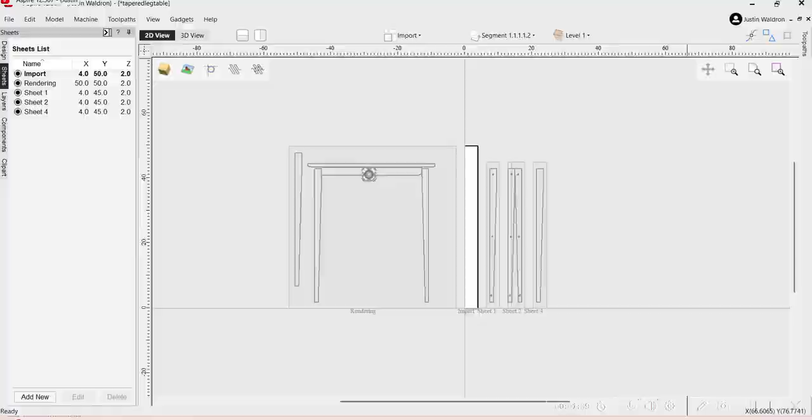But anyway, I'm going to bounce between OnShape and Aspire, but for this, the Vectric would work first. So what we're looking at making is just a tapered table leg.

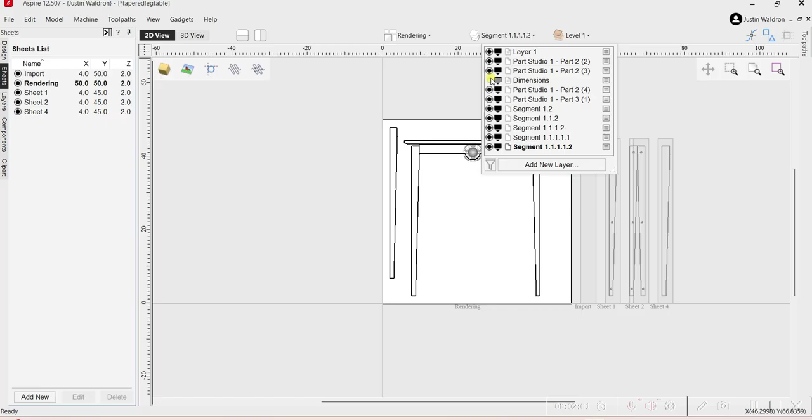So what I have is this hall table that I've drawn up just to show what we were looking at, and I went ahead and added dimensions to this table so we know what we're making. The only thing, after designing it, I would have probably made this apron like 3 inches or so. But nonetheless, I'll show you all how I went through just making the leg itself.

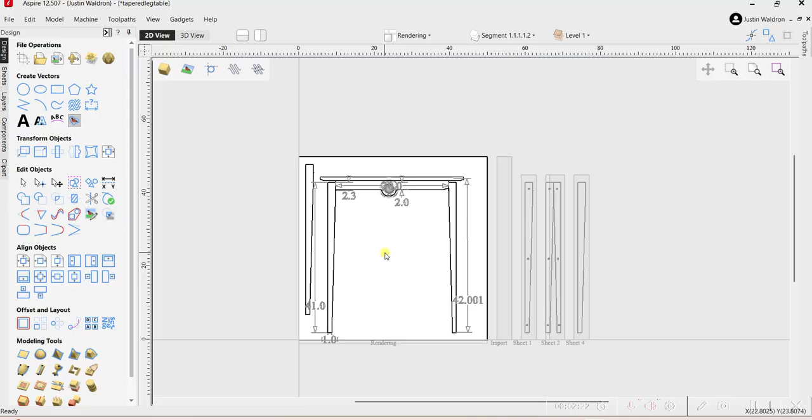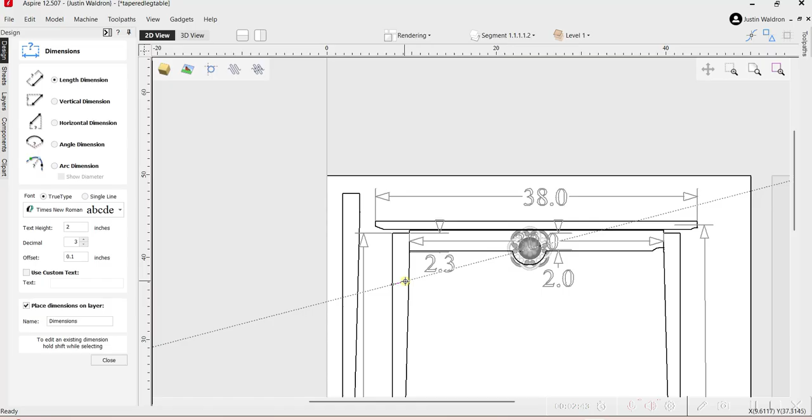So if you don't know, we have a dimension tool over here where we can take the overall dimension of a piece. So you can actually use this as a parts list, or once you design your stock, you have your parts lined up so you could cut from here.

Anyway, we're going to turn this off, and I'm going to just add a new sheet really quick. And we'll give us some room on this one.

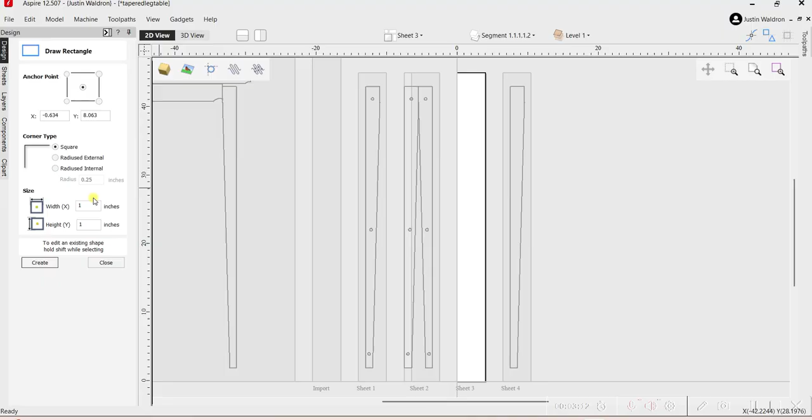So our leg stock I've got at 2 inches thick. And the first thing I want to do is I want to draw what is going to be our leg blank. So here's our leg blank.

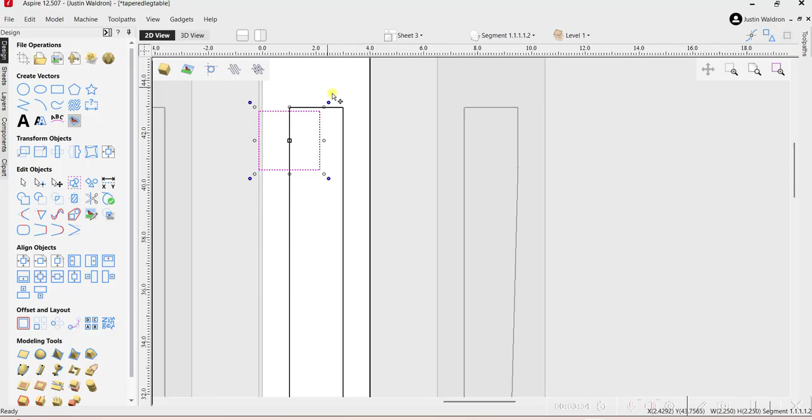Then what I'm going to do, I know that my apron is 2 inches wide. I'm going to make a 2 1/4 inch square. And I'm going to stick this right at the top of this table leg that we made. I like using these shortcut keys over here for placement.

And then I want the taper to start 1 inch from the bottom. So I'm going to make another cube. And I'm just going to send this down to the bottom. This will make sense once we get there.

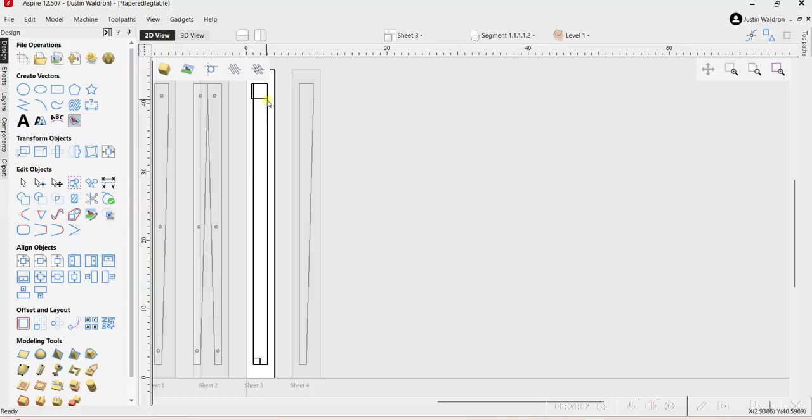So this is outlining where my taper is going to start back up to nothing. So I'm just going to grab the line tool, stick a point there, and we're going to call it right there just for show and tell here.

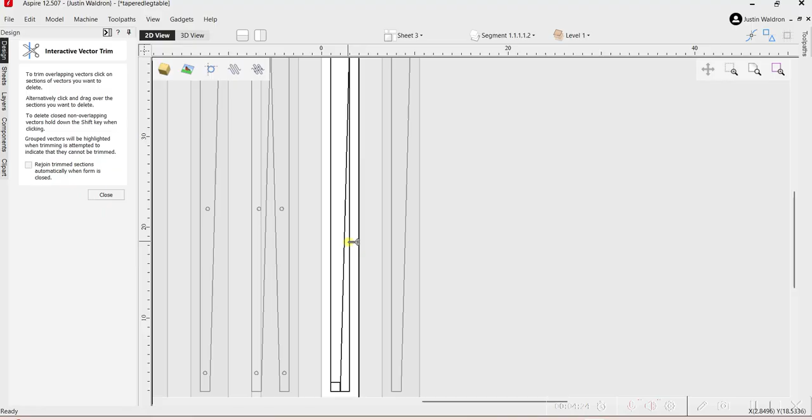Then we'll just come in with the snippet tool, Control Z if you didn't know. We're going to delete these 2 blocks. And all I did with these blocks is it was just as a reference.

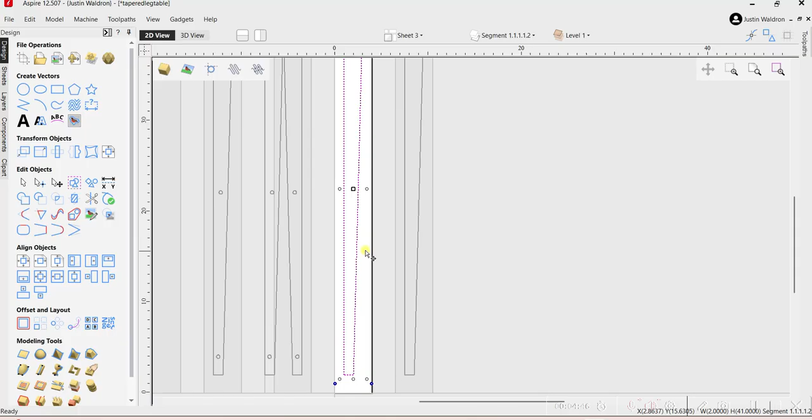And then we're going to go over here and we're going to join these vectors. So now we have what's a solid vector. So if you have a 2 inch piece of stock and you wanted to cut this taper, you would just simply set up your profile cut around the side.

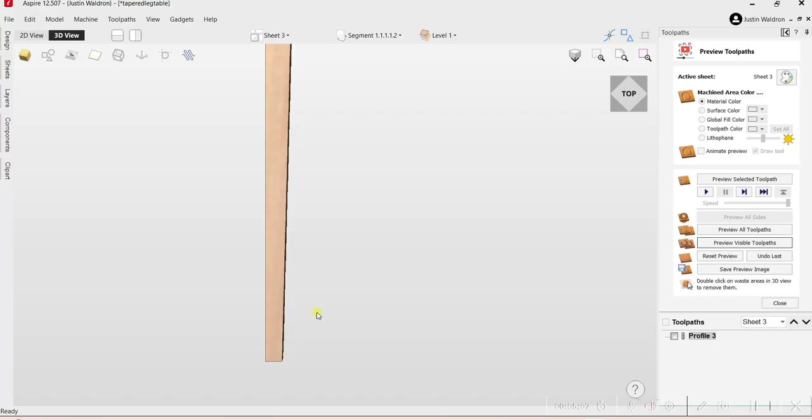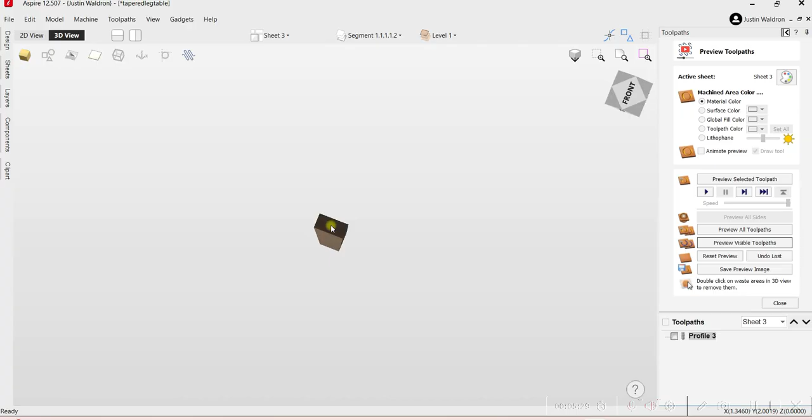And then we're left with this right here. Now, if you wanted to also add an inside taper to this, you would make this cut first, then rotate your stock over on the CNC, run that same profile cut that you just made, and that'll cut this inside portion off. And that'll give you your 2-inch down to 1-inch taper on the inside part of the leg.

So the other thing you can do if you don't have 2-inch thick stock is we're just going to take this half leg that we made, for instance, and we see I have some drawings here. We're just going to drop in a couple holes for dowels. I made these 0.38, little room for a 3/8 dowel.

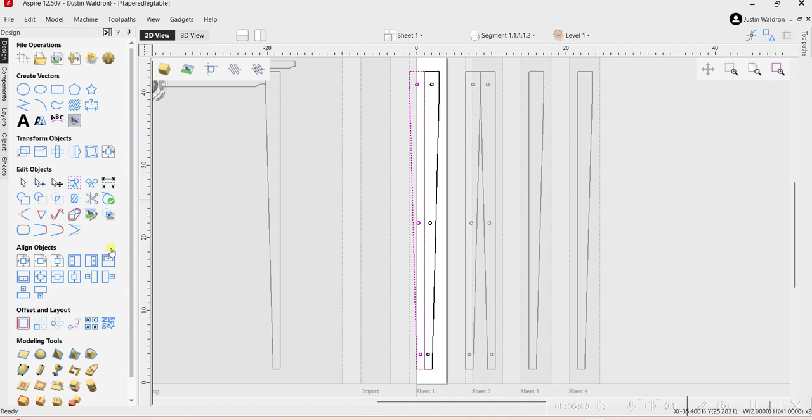So here's one leg half. And then if we come over here to the mirror tool, here you have what would be a book matched leg. So these two pieces would get cut, you would glue them together, you have your registration, and then you would go back to the profile cut that we just made to cut that inside part of that leg blank if you were interested.

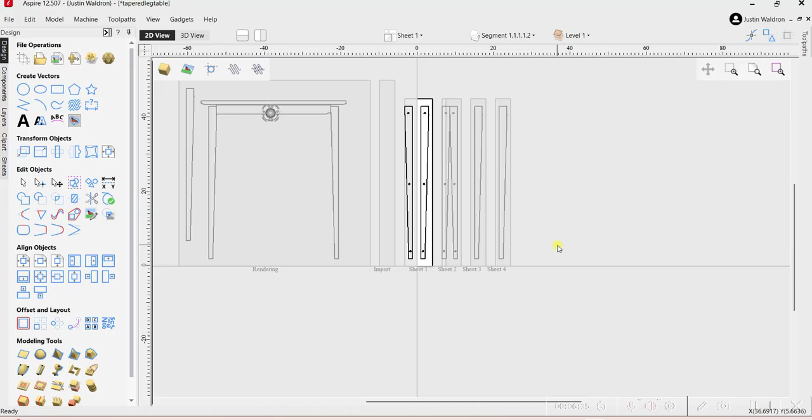So the next thing I'm going to do is I'm going to go over to OnShape and I'm going to show you how we can design this part in OnShape.

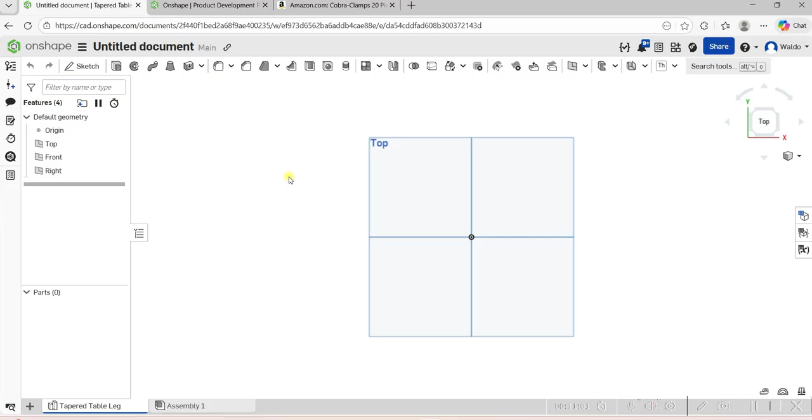I do enough rambling, so I'm moving on. When you open up OnShape, you have an option of creating a document. I've already done that, so I've set this up as if we were looking at a 2D view, just like we were in Aspire, and that's how I'm going to model this.

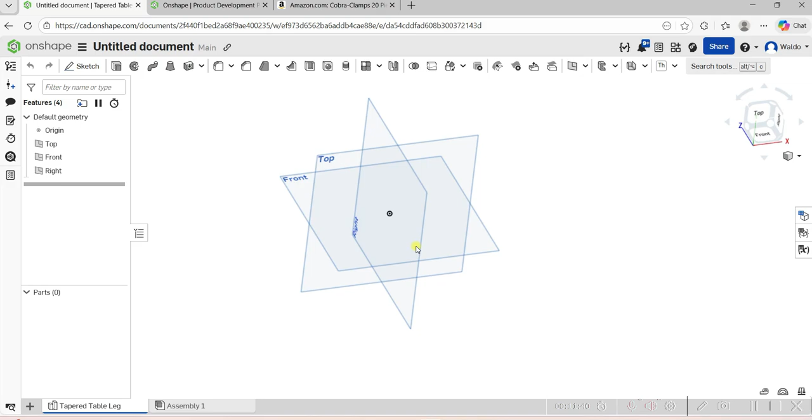So anyway, basic functions of OnShape. Here we are in OnShape. This is a true three-dimensional software, so you can see your XYZ planes, top, bottom, everything. That was the hardest part for me in the beginning because I'm so used to that 2D plane, and now you have options. So I'm going to try to simplify this a little bit.

Like I said, I'm going to explain what I'm doing, but I'm going to move moderately fast so everybody can see. And again, you want to go back and watch.

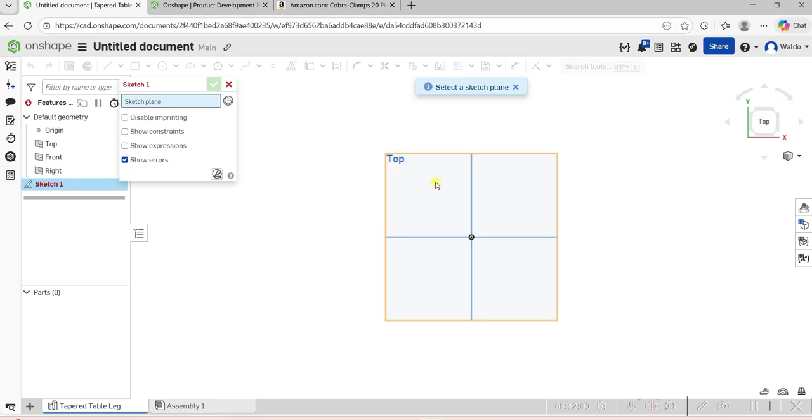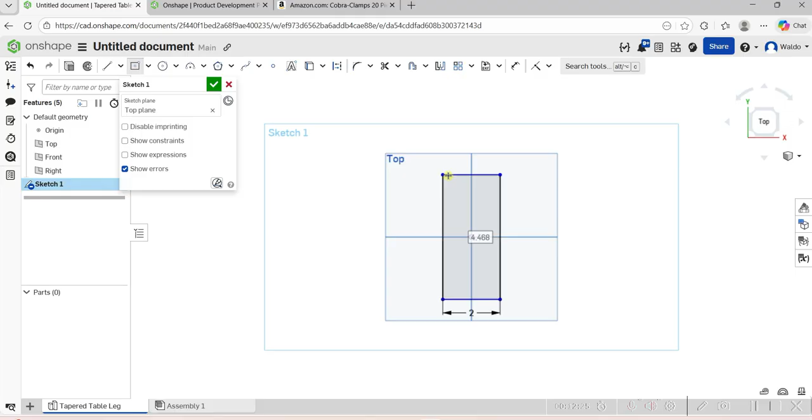So we're going to select this top plane. I'm going to come up here to this corner triangle or rectangle tool, and grab a center point rectangle. With OnShape, I just left click, let go, and here's the start of our shape. I'll left click again, and then do our dimension of 2 inches wide by hitting 2 and enter, and then 41 inches tall. Here's the overall sketch of our table leg.

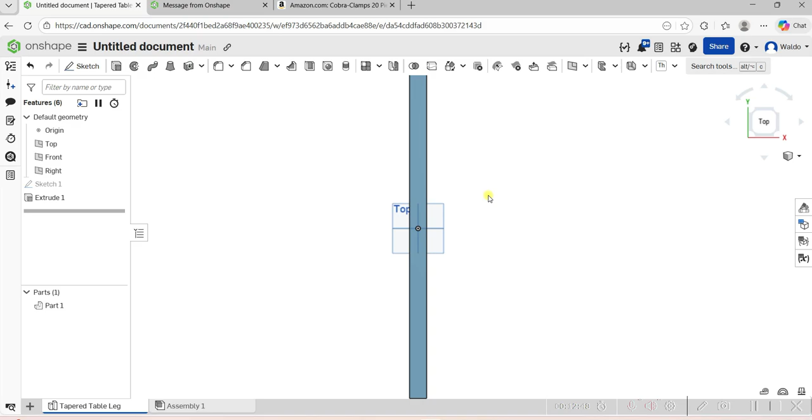So we have an option here right away where I can extrude this and make it 2 inches thick, which is what I think I'm just going to do. So we're still in the 2D view, let's say, but now if we spin this object, we can look at all 4 different sides of this.

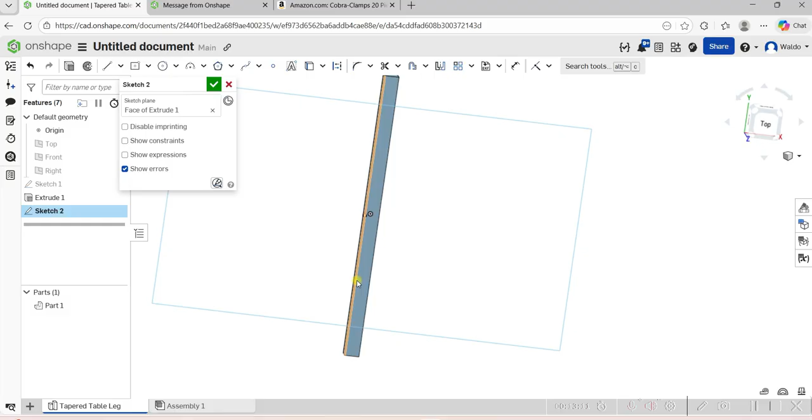For this next part, I'm going to turn these planes off with a P. I want to sketch on this face because now we're going to draw what's going to be our taper. We can click on the piece and hit N, which brings whatever you're looking at normal to your view. So if we look, we're back at this top plane over here.

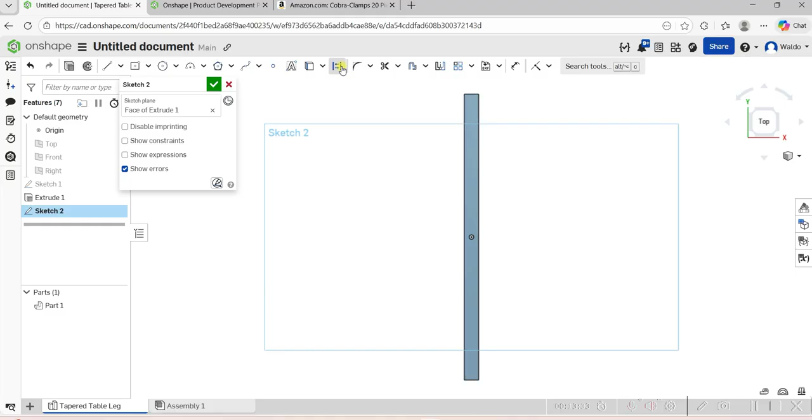Now we're going to go up here to this line tool. This is a line, and you have a few options here, and this is called a construction line. I want everybody to think back to what I did in Vectric, where I did the 2-inch block or 2 1/4 inch block up here. So I'm going to do the same thing, except I'll use this line and construction tool, and come down 2.25 inches, let's say.

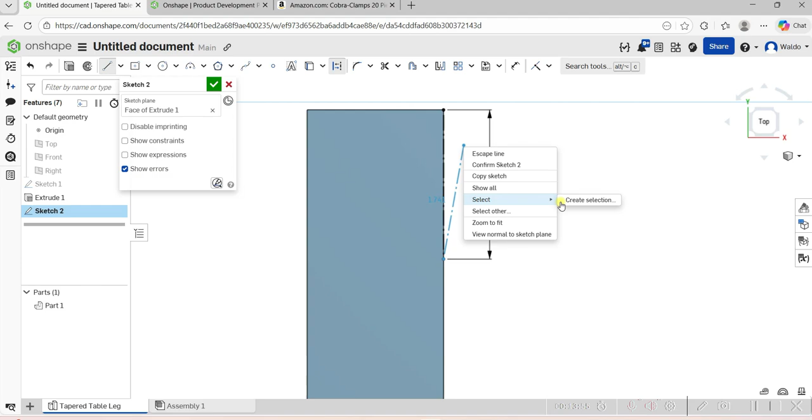To make this easier to understand, in Vectric when we have a solid line, we have a completed vector. When we have a broken line, we're incomplete. So that's basically what this is, just a guide for us.

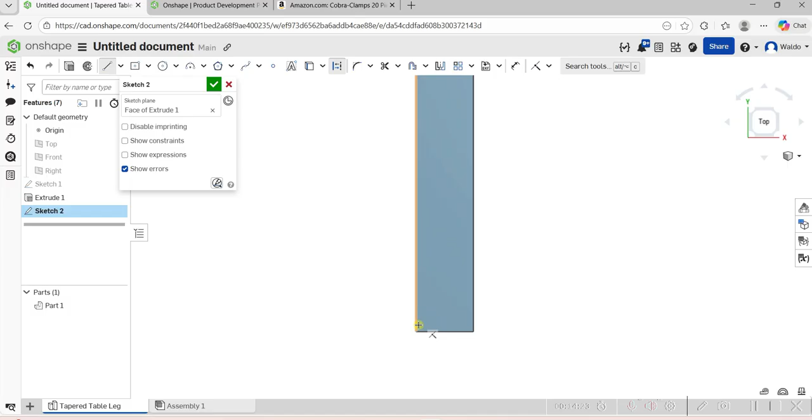So then I'm going to go down to the bottom here, and we have shortcut keys, L. Here's our line tool. If we hit Q, that activates our construction mode. This is all going to make a lot more sense here in just a minute. Okay, we're not going to worry about that there. So we have a 1-inch guide there.

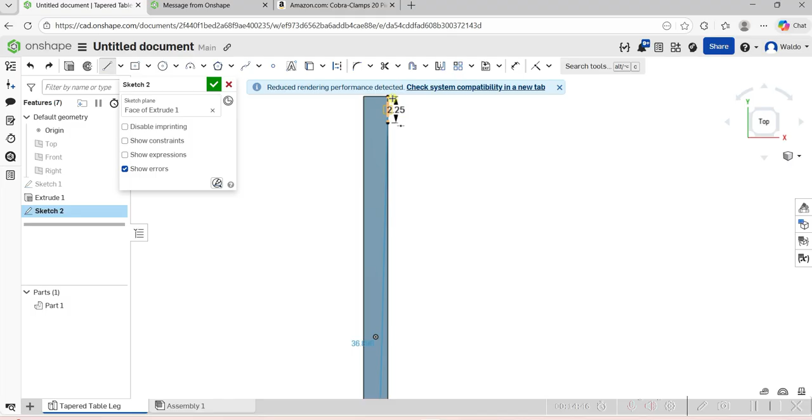We're going to hit L, our line tool, and grab this point. This is what I like about Onshape that's different than Vectric—Onshape can tell, hey, I know you want to grab this point, and you can see by the little icon that shows up that we're tangent here, or in plane with this, etc.

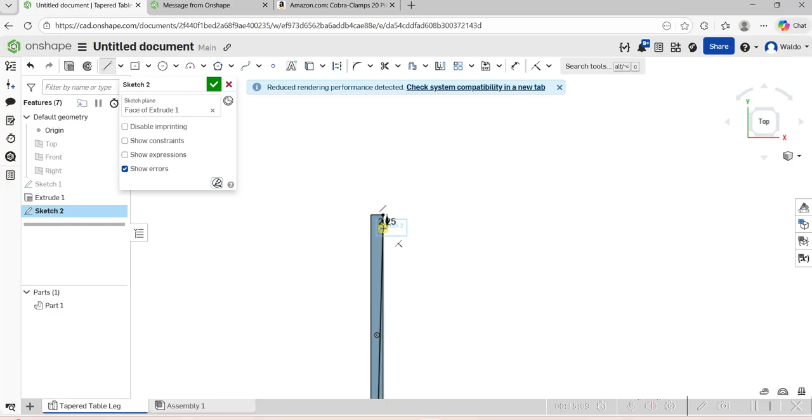So the next thing we're going to do is complete this whole vector here. We're going to draw a line to this corner here and back to here. So now what we're looking at is a three-dimensional view of that leg with our sketch.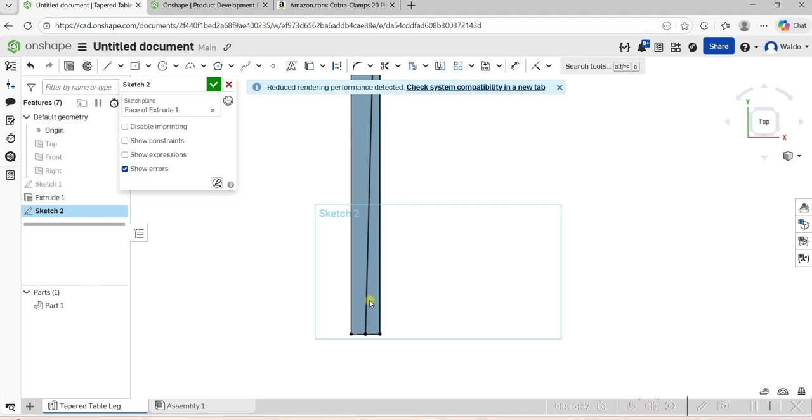This just means your Wi-Fi may be a little goofy. So what we want to do now is cut this inside part out. If you hit the space bar or escape on this one, you can see this side highlights, this side highlights. We're going to highlight this side with a left click, come up here to extrude, hit remove. You can do 2 inches here because our stock is 2 inches, or you can just hit through all, and it will remove that whole piece for you.

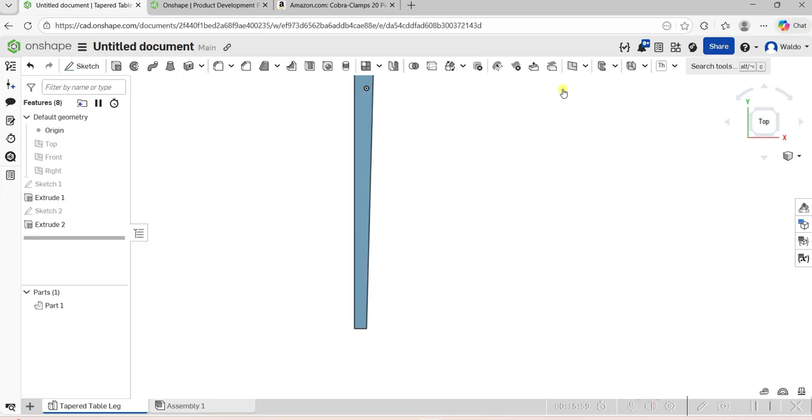So here we are with our three-dimensional leg, just like we had in Vectric. Now, if we want to make this inside, we're going to do the same thing we did before. We'll short key, and sketch, using a line tool.

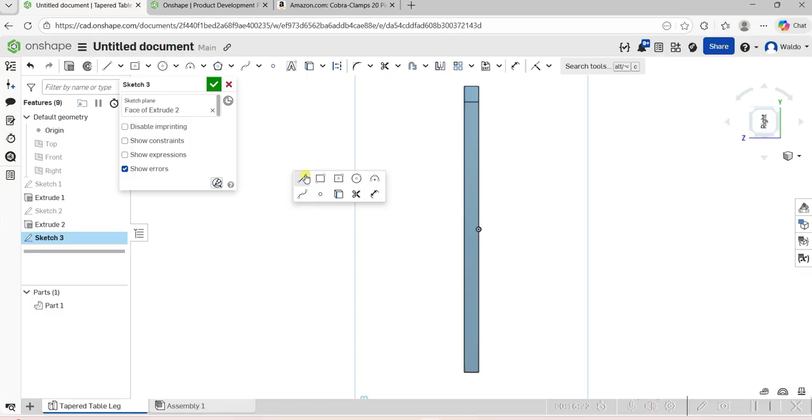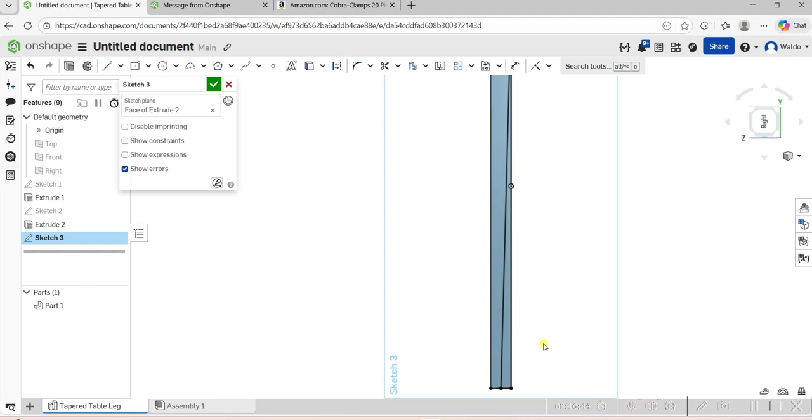Q, and all we need down here is to come in and drop, and that's 1 inch. We're going to short key just like we did before, grab this point, and then do the same thing—remove this inside portion.

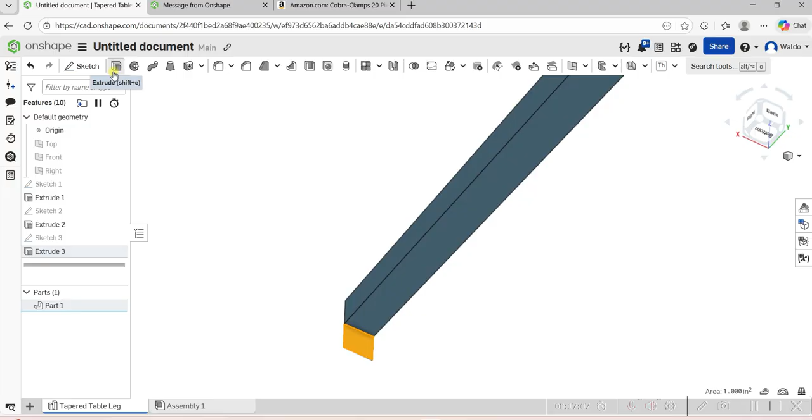And here we are. You can see I didn't quite grab that bottom long enough to get this cleaned off, so it's this simple—we're going to just left click that, hit remove, and there we are.

We're back in business. So this is a super quick tutorial. I don't know how long this took, but even so, showing how to design this three-dimensional part.

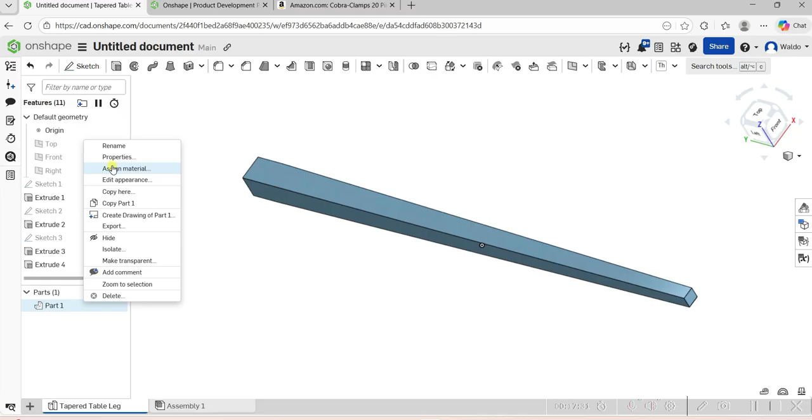So now what we're going to do is export this. We're going to go here and export this piece. We want to export it as an STL. Here it is up here. You can just open this if you want.

But we're going to go back over here into Aspire now. And if we see, I've got this import tab set up here. So we're going to import this component model.

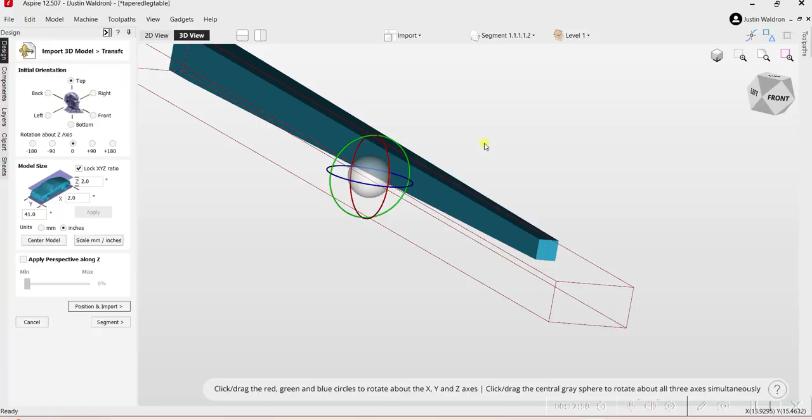Now, the only thing everyone is going to have to pay attention to when bringing this in is the direction on which that taper is. So it looks to me that the taper is here and here, so I'm going to rotate this.

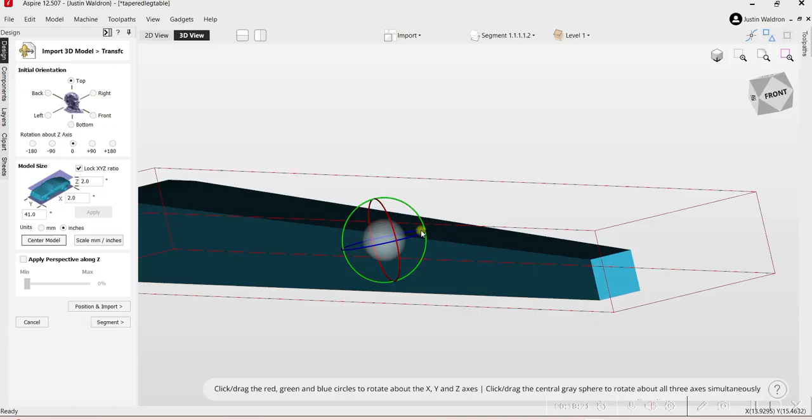90 degrees, then I'm going to center our model. This is a lot easier if you're not using this double-sided taper deal. So we're going to position and import this. I want our leg stock shown above the material because we're going to cut all the way through. We're going to import this.

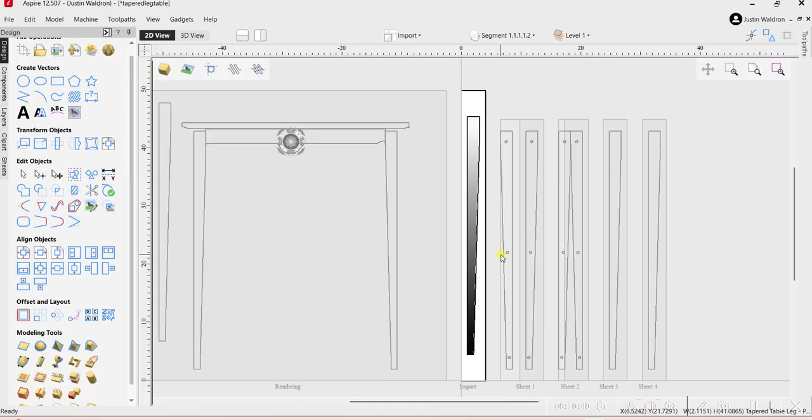We're going to highlight this and come down here and draw a boundary box around that, so now we can make a profile cut if we need to. I'm going to make the tool paths just to show everybody, but these are not going to be the tool paths you should use for sure.

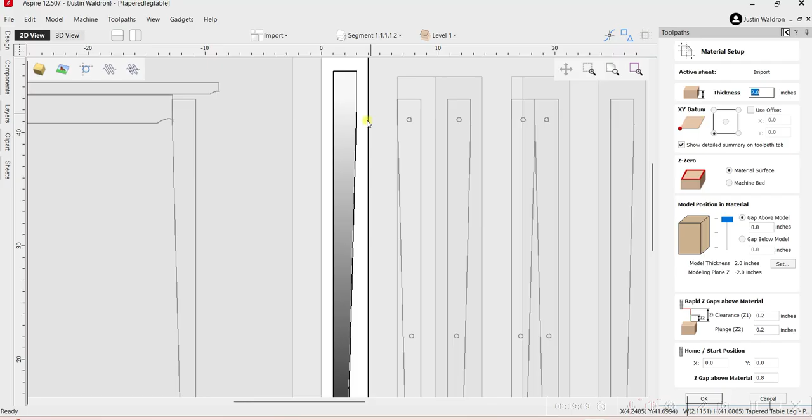You're going to set up your active sheet so it shows our stock is 2 inch thickness. Lower left datum is what I always use, material surface. We're not going to have any gap above the material because we're 2 inches and we're going to make a 2 inch cut. I keep my rapid Z movements at 0.2 above the material, and we're going to hit OK.

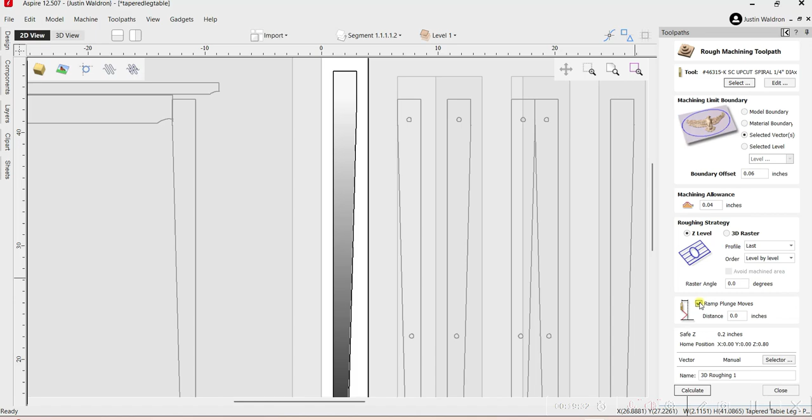I'm showing a 1/4 upcut spiral bit, and we're going to come up here and set ramp plunge moves. The other thing to take a look at, go back up here and check to see what your step over is. Our step over is at 40%, so no matter what, we're going to get kind of a rough cut there.

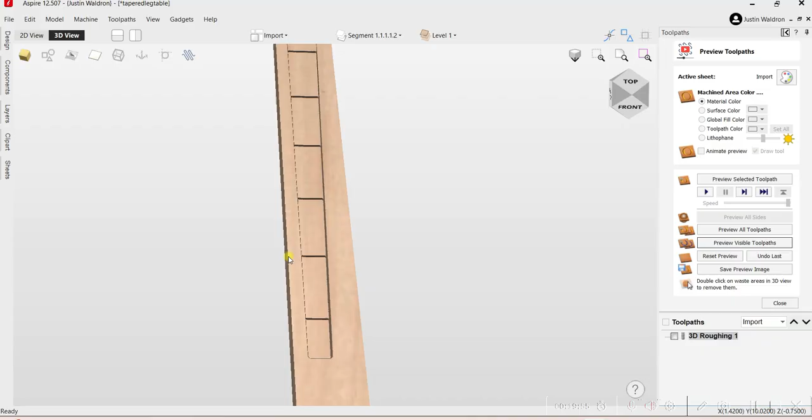Okay, so here's our roughing tool path. You see that's basically all we're left with on this inside face. So you can decide whether you're going to sand that bit off if you want, or come back with a bigger end mill and clean that up.

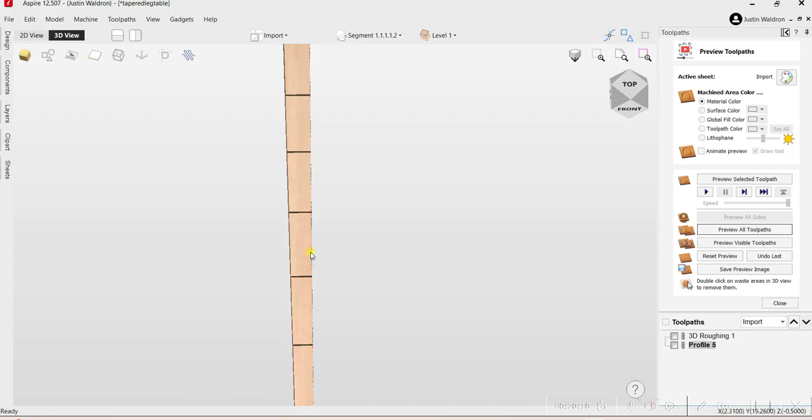But here we are, basically with our tapered table leg. So what the software did is taper this front portion. You could use a ramp or the molding tool path if you wanted to, but then we'll come back in and clean this up so everybody can see. This is just whatever's in here, I'm just going to go with.

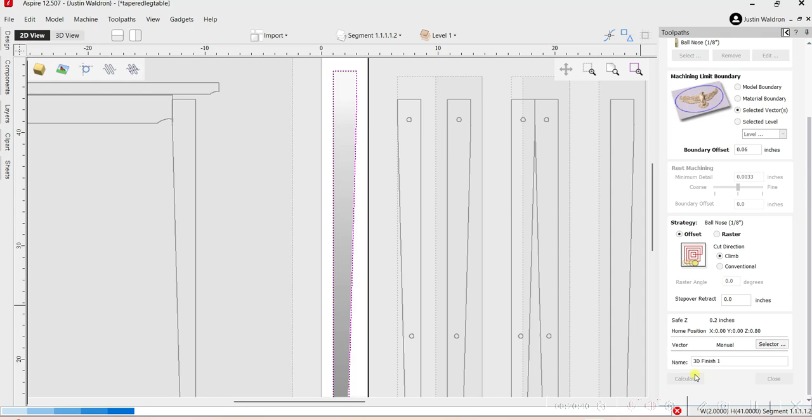And here we are, so that's it. That's two ways that you can make a tapered table leg in Aspire.

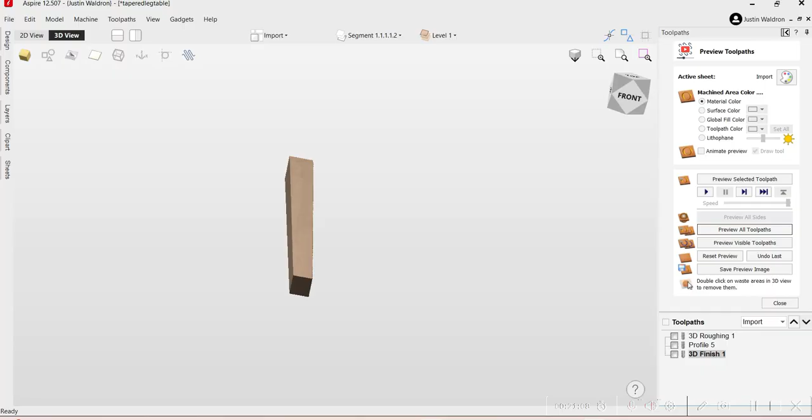So I want to show everybody one more thing. Some of you have seen my videos where I make really big tables and stuff like that using the CNC, and I'll show you really quick how I go about doing that.

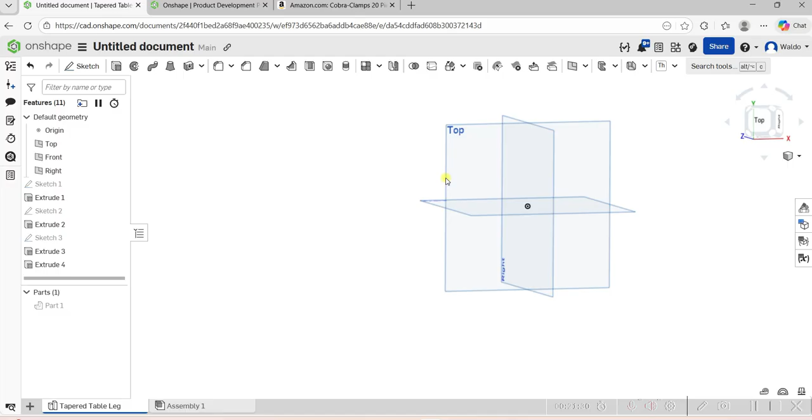Another cool part in OnShape is this is part 1, so we can turn this part off. This is how you can actually come in and build different parts of furniture within the same plane, so to speak.

For this one, I'm going to start with the top plane and make a dining table base, and I want this to be 18 inches tall, just the base. So what I've done here is I've taken this top plane, right-clicked it and did offset, and gone ahead and made this top plane 18 inches taller.

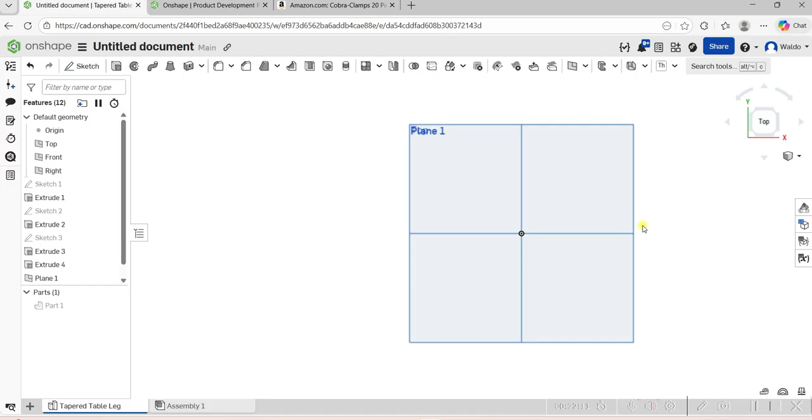But this is going to be a little bit different. So instead of using the top plane like we would in Vectric, or plane 1 as this shows - and I know I'm moving fast, I just want to show what this software can do for everybody - I'm going to draw on the front plane. I'm going to hit sketch.

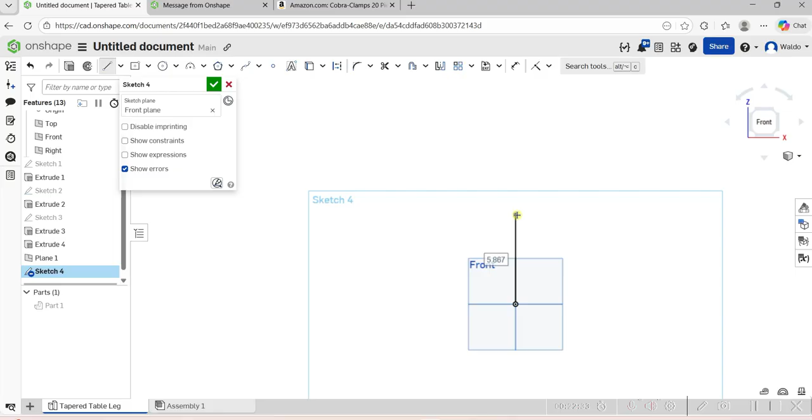The first thing I want to do is just draw a line up, and I want this line to be 18 inches. Okay, so that's where our bulb or whatever is going to be. I'm just going to hit escape for a second so we can decide how we want to design this.

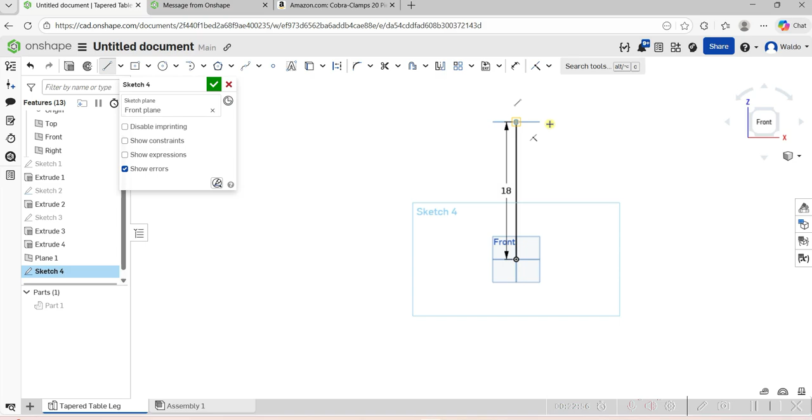So our tabletop would go here, and let's say you were going to make a 24-inch tabletop with a 12-inch overhang. So we need 6 inches here, so we'll go 6. And then we'll need the base to be big enough so the top doesn't flip over, so I would say 9 inches there.

So now all we're missing - and the way that I design furniture and things like that - is I get my constants first.

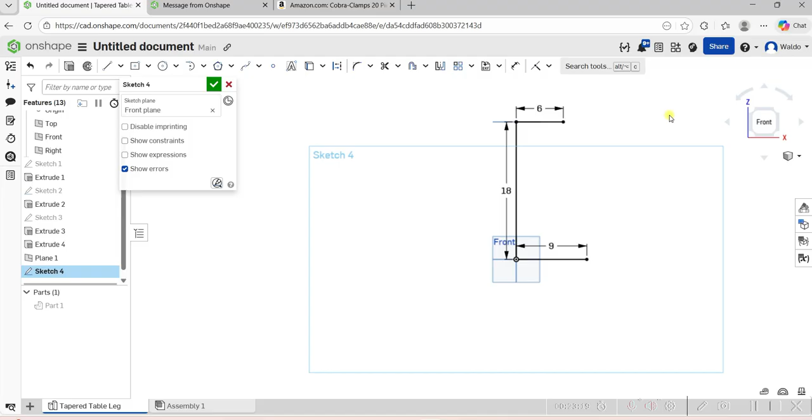So the part of the project that I know is not going to change is my top diameter. And I know if I have a 24-inch top, this is going to get doubled, so I'll have an 18-inch base, which is more than stable enough to carry that table.

Now what I'm going to do is make a bulb in the middle, just like a lot of people see on my furniture. I'll just grab this ellipse tool, and here's a bulb, so to speak.

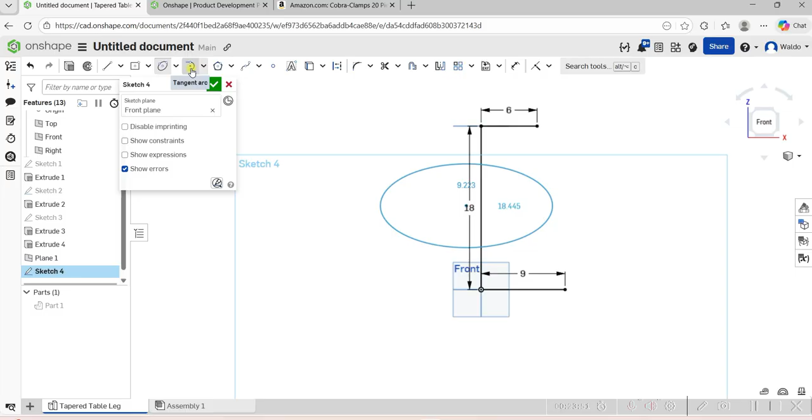You have arc tools. The tool I like the most is this one. I should have left that ellipse there—let me go back and do that really quick. So you can tell the software how big you want the ellipse, and so on. Our ellipse is in place.

Now I'm going to grab this spline, and you'll see really how fast this stuff is. I like a little round over here maybe. All I'm doing is left clicking and dropping little points—that's all I'm doing.

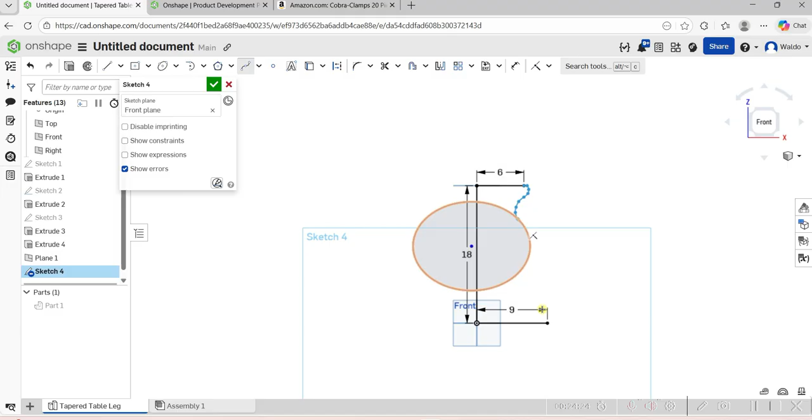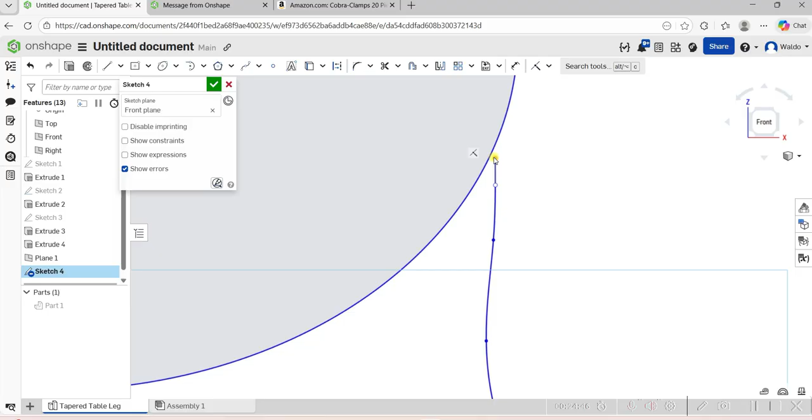Now to get a better look at this, I'm going to make sure all of my points here are touching one another. Now I'm going to grab this trimming tool, just like we have in Vectric, and trim these parts away. So for all intents and purposes, this is what would be a vector, and it actually doesn't look bad—I'm pretty shocked.

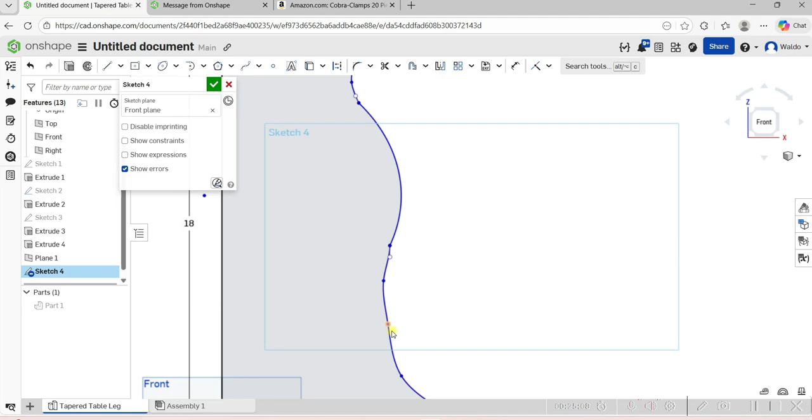But anyway, you can go in here and just grab these nodes—there might not even be called nodes, I'm not sure what they're called on this software, but I'll call them nodes for this. You can see this one has a Bezier attached to it, just like in Vectric. You can just grab these lines and move this however you want.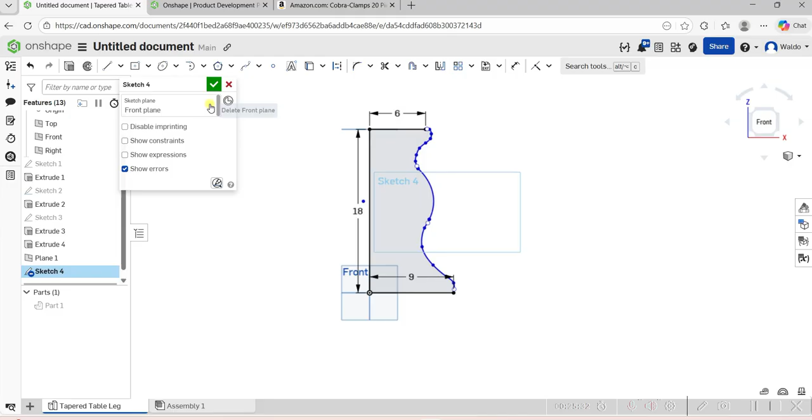This is good, we're complete here. We're going to take this revolve tool, highlight this, and then I want to spin this all the way around on this axis here. And that's how fast you can design a table base.

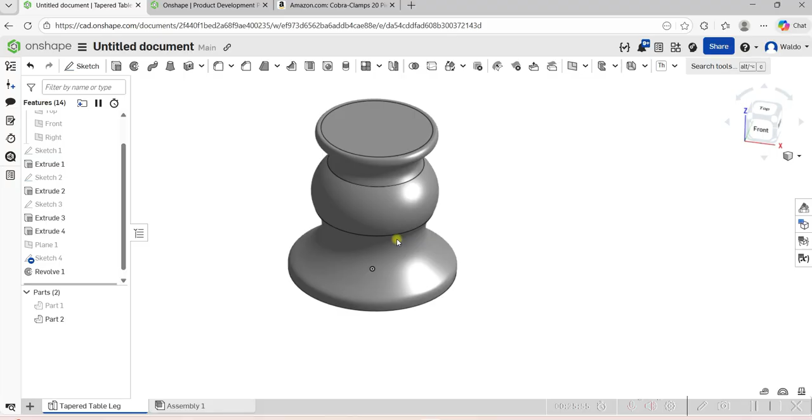Now let's say you want to take a look at it, see what it looks like. So I want to draw on this face—let's go ahead and draw our top in there. We're going to grab a center point circle. Here's our center point, we'll left click. We wanted 24 inches.

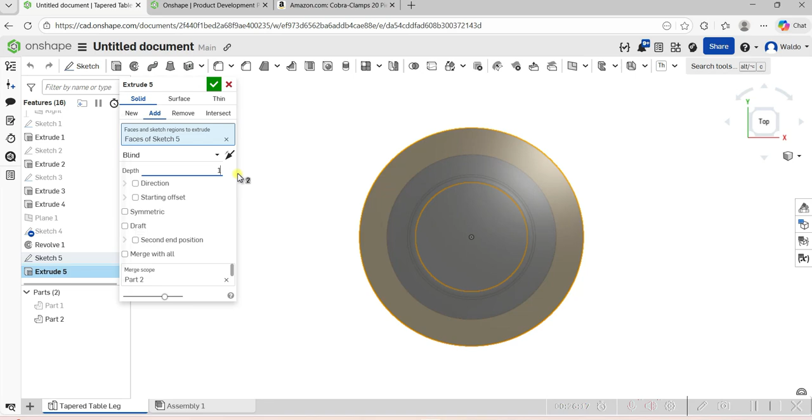We're going to make our top 1.25 inches thick. Okay, and here's our table.

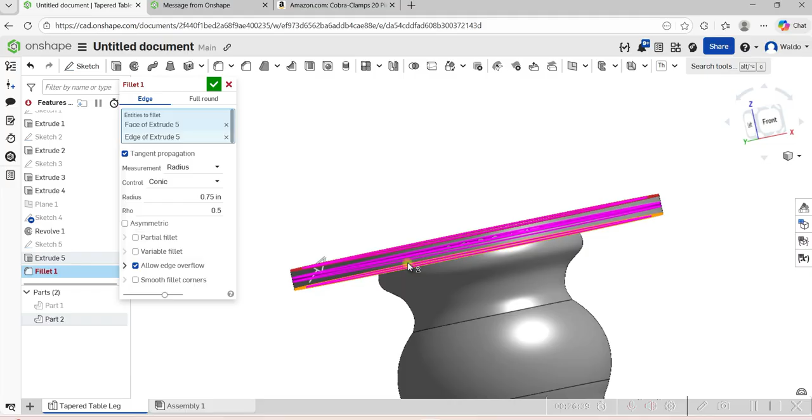The other thing we have with the software that's really cool is you can just drop fillets wherever you want. So if you click this top portion, you can choose how big you want the fillet to be, or just an edge. Pretty neat software here.

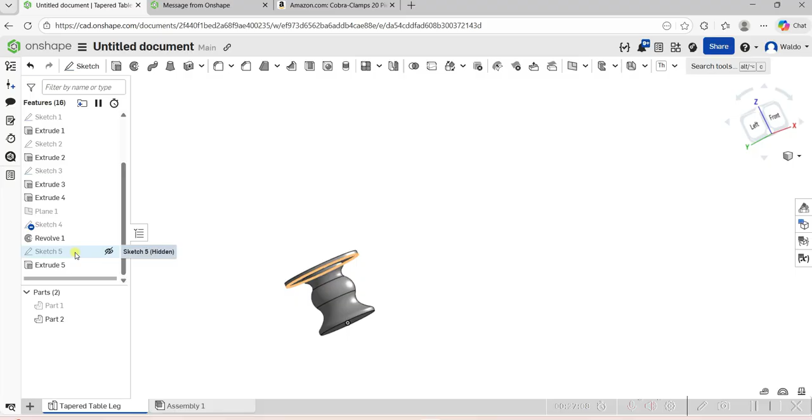So enough of this, and then we're going to follow the same principle when it comes to exporting this over into—sorry, I'm getting confused here. There we go. The only thing we would get rid of is this top. We don't need the top, but same as before, we would just export this.

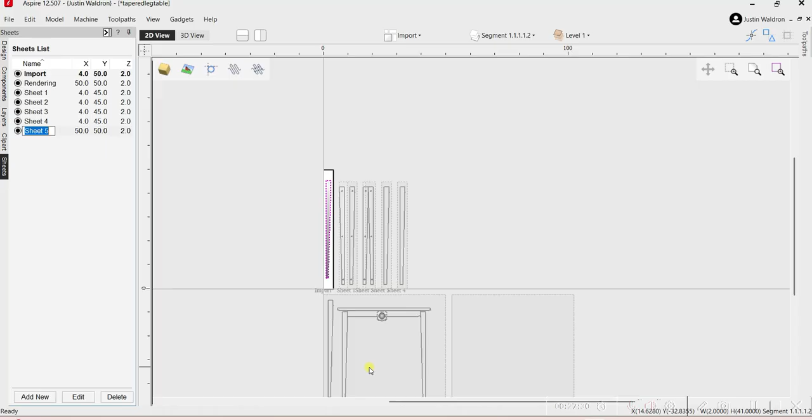We would come over into VCarve or Aspire, whatever you're using, and add a new sheet. I've already got this one set up. Sheet 5, we'll bring this composite model over, and there it is.

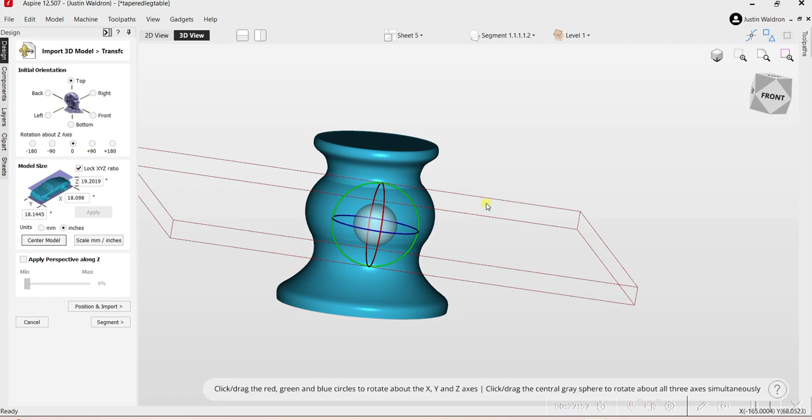So now at this point you have the option—it's based on your machine—whether you want to try to carve this piece this way or that way. But at this point, you can center the model where you have it below the table if you want, so you can do a two-sided job. You can rotate it this way, center the model, segment it meaning slice it into segments, or you can also slice it after you've completed the model, which is typically what I do.

So anyway, I know this is a lot. Hopefully this was helpful and everybody learned something. If there's anything you want to see me try to design, let me know in the comments, that would be great.